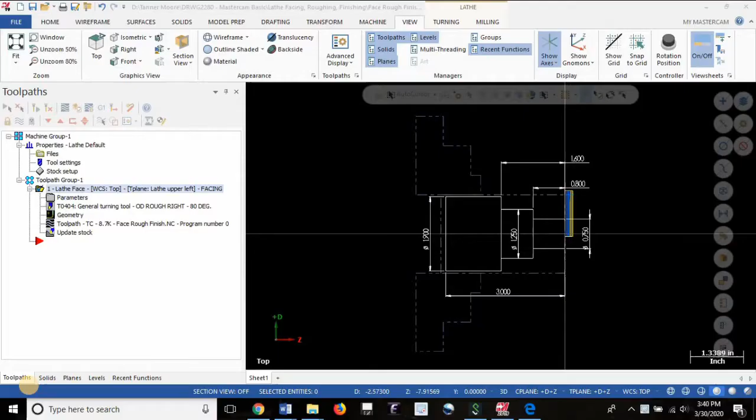Alright, in the last video we completed the facing operation on this workpiece. The next step is to do the roughing operation, and I want to clear out this chunk of material right here. We're not doing any turning on this 1.9 inch diameter, but we'll rough the 0.75 inch diameter and the 1.250 inch diameter back 800 thousandths out to the first shoulder, and 1.6 to the second shoulder.

Before we begin selecting any geometry or applying any toolpaths, one thing I want to do is get rid of this line segment between the diameters, because when the geometry is selected, it will get to this point and won't know whether to go up or down. So if we clear out this section here and this section here, we won't have any issue with geometry selection.

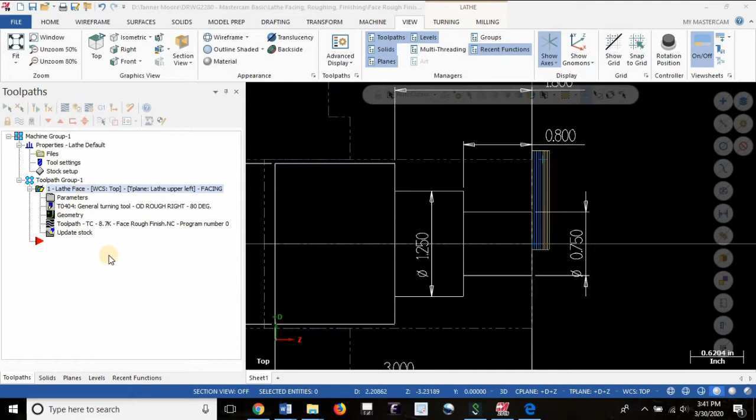It's always good to tidy up your drawing first before doing any toolpath application. I'm going to tidy up this window by hiding the toolpath for the face operation. Let's go into wireframe. I'm going to use the divide function to get rid of that line. You can see we still have a complete profile, it just tidies up the whole thing a little bit.

So if we go to the turning operation, remember in the previous video we faced right up to Z0, so we're not doing any finish facing in this particular toolpath. We faced right up to Z0, and now we'll just rough and finish these lines right here.

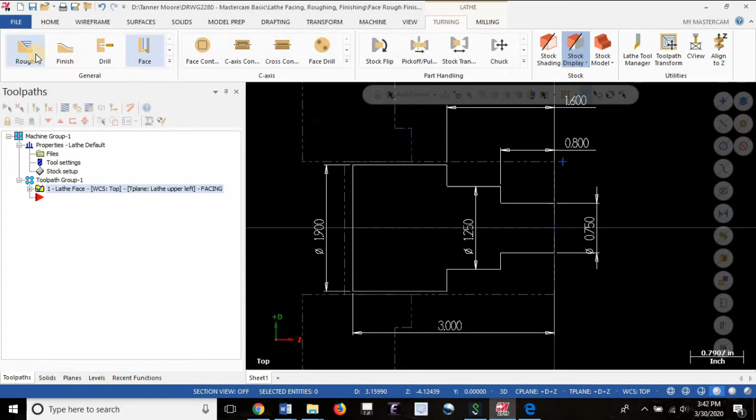Okay, let's pick the roughing operation. It says right here within this chaining window, select the entry point or chain the inner boundary. I'm not going to change any of the options here. It's a pretty powerful menu, there's a lot of tools here, but for what we're doing, and for the vast majority of work in Mastercam, you can take care of things with the default options presented to you.

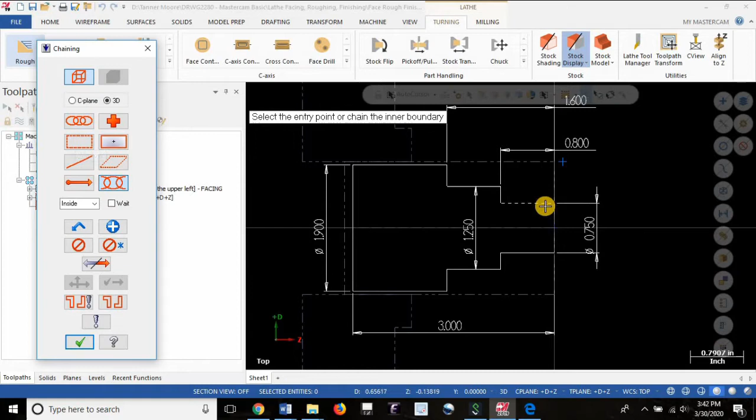Be careful again with your geometry selection. We want to start at this line moving in this direction. Just like when you're on the mill, you want to be careful about where along the line you select, because if we pick over here, it's always trying to force us to feed in a particular direction. It assumes if we pick on this half of the line, that's the starting half or first half of the line, and we don't want that. We want to go the opposite direction.

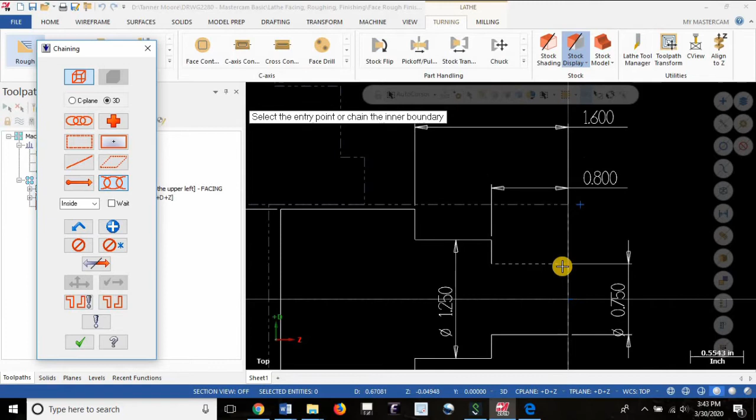So I'm going to hit the no smoking sign and then select the right half of this line, or the first half if you consider the direction to feed. We're going to go right there, and you'll notice the dialog box has changed to say select the last entity, the final line you want to be machining in this operation. It's a fairly visual representation of what you're doing, and we want to pick right here.

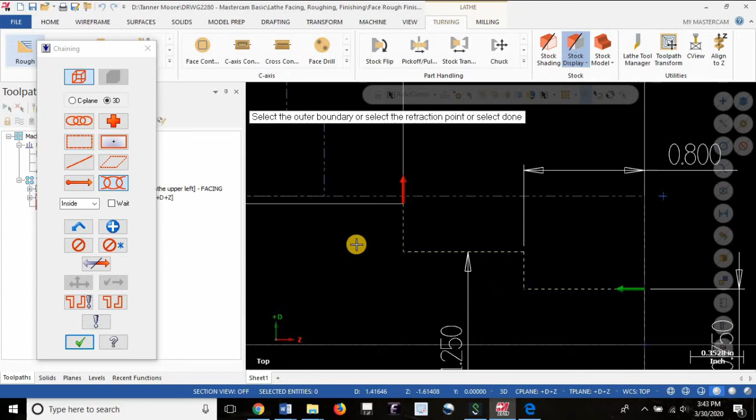You can be a little less careful about how you pick this line. If you want to maintain best practice, pick the bottom half here. Notice the dialog box has changed back to the original setting. I'm just going to hit check, there's no additional geometry to select.

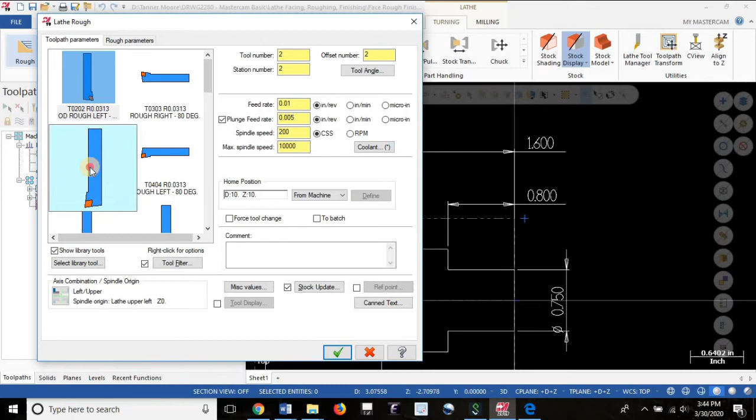We have to go back through the same process we did to select the facing operation. We're going to use a roughing tool just like we have in the shop available to us. The good news is we're going to use the same roughing tool we used for our roughing and finish facing, and I'll explain the force tool change button in this operation. We'll pick tool 4 as established in the previous video. You'll notice tool 4, offset 4, station 4 are all switched over now. It's the same tool nose radius, OD rough turning tool, right hand orientation, 80-degree insert.

For the feed in this roughing operation, we can go anywhere from 0.01 to 0.015. I'll stick with maybe 0.012. Plunge feed rate we can leave as is, that's your non-cutting but also non-rapid feed rate, you're in a G01 with an F program. If your tool rapids to this position and then feeds in before cutting, that's the slow feed rate. We can leave that alone, it's kind of nice to have a slow movement into the workpiece, a little less scary when running the machine.

Now with our spindle speed, we can get a little more use out of this tool because we'll be feeding toward the chuck, it's a more robust operation. So we go with 400 cutting speed, and again set the max spindle speed for safety because centrifugal force can cause the chuck jaws to separate and release the workpiece. We'll go with 2000 RPM, coolant turned on, and we'll turn this force tool change on.

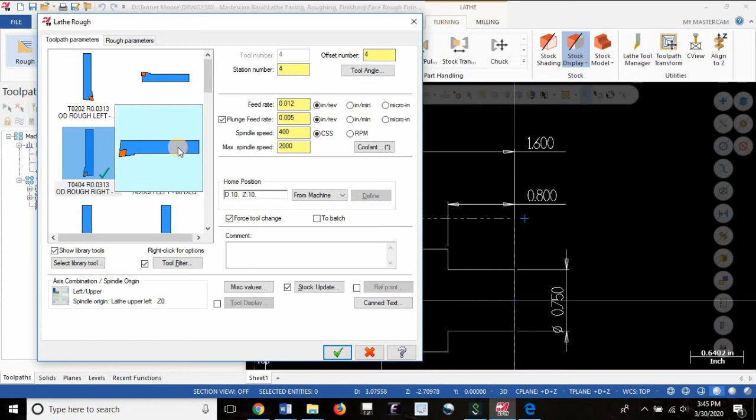I'll explain what this does right now. Because we did our facing operation with tool number 4, if we hadn't turned that on, when Mastercam produces the G code to send to the machine, the facing operation would happen and then immediately the roughing operation would begin with no pause or interruption in between. By having force tool change come on, it inserts an M01 and a tool change code, allowing us to stop the machine between operations to check the condition of the tool, take a measurement, check surface finish, or just be able to restart the program after, say, a lengthy facing operation.

You want to be able to restart quickly at roughing because you've maybe hit emergency stop or a feed hold and a reset in between. It just allows you a lot more flexibility and versatility. So you're better off to always use it and turn it on because it will save you more time in the long run. It very rarely costs you any time, but it often saves you a lot of trouble. I highly recommend always turn on force tool change, even if it doesn't make a difference.

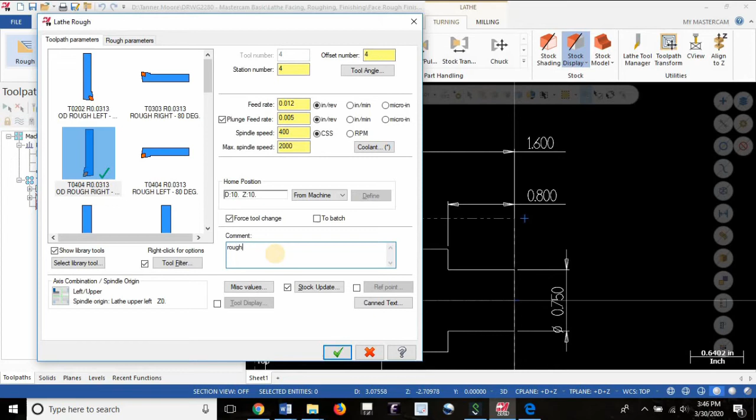So as usual, we'll give this a comment, and let's call this rough profile. Nice caps lock so everybody can see. And within this window, you can see it's a little more detailed than what we had in the facing operation, but we still only have to concern ourselves with a few certain fields.

First of all would be the depth of cut, and depending on what kind of machine you have, maybe you're only capable of a light cut of about 30 thou, or maybe you're on a more robust machine where you can go 150 thou radial depth of cut. I'm going to go with something a little more modest for a common application of about 60 thou. It's aggressive but not overly aggressive.

And then we want to focus on the stock to leave in X. This is your rough surface right here, and this is your finished surface. How much are we leaving on for finishing? The advice I typically give is to slightly exceed the tool nose radius of your finishing tool. So if you have a 15 thou tool nose radius, 0.015, maybe you can input 0.02 to get good cutter engagement, good tool life, and a great surface finish on your workpiece when you go to finishing.

Now in Z, you have to be careful because this is the shape of your insert right here. And when you bring your finishing tool in to finish this surface after roughing, if you've left a lot of material on Z, you get a lot of engagement between this face of the workpiece and this face of the tool. In order to avoid that, we go with a lot less material left in Z to reduce stress on the machine. You can go pretty low with this number, about 0.003. You'll still get good results, but you do have to be careful about leaving too much material in this category.

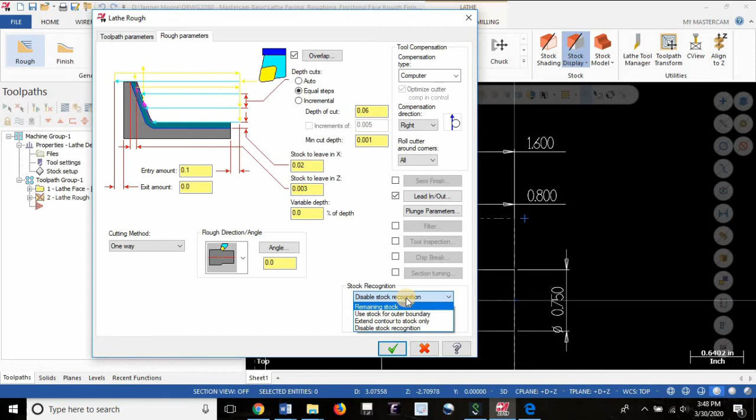One more thing I want to change here, because most stock settings work just fine as a default condition, is changing the stock recognition to remaining stock. So I'm going to go from disable stock recognition to remaining stock. This will make the computer consider, look at that, after hitting the green check mark, how quickly that generated. Anyways, it causes the computer to consider where the rough material, or how much material has been removed already with facing, but how much remains before doing your roughing, to decide where the tool path is generated. That's a really important one that can help avoid some crashes on the machine.

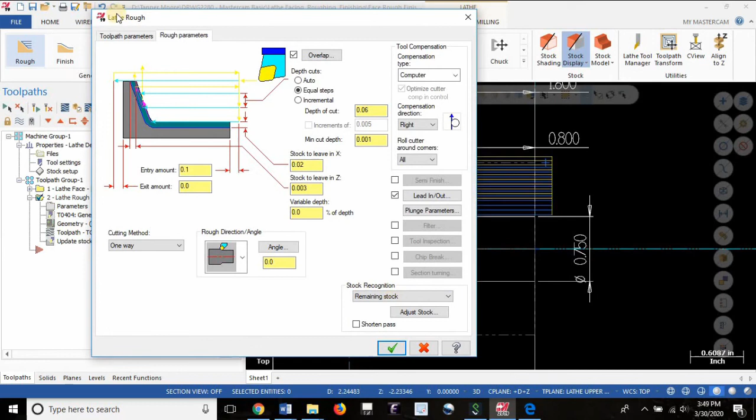I would encourage you to turn that one on as often as you have a choice to, just like force tool change. But let's take a look at that operation. Everything looks pretty tidy. You can see here on the negative side of the workpiece, or what is below X0, that's the pattern you would get out of your workpiece. Let's take a look at the back plot, and then we can do a quick simulation coupled with the facing operation.

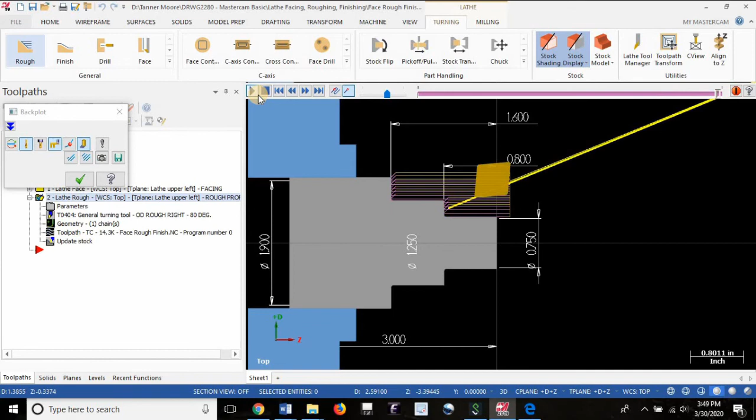You get a really effective tool path. It sure beats writing the G code to perform the same operation, especially this feed path right here, where you see it goes up and over 2 different diameters. It would take you a little while to write that code, but it's pretty easy to generate in a few steps. And if you want to do something like increase your depth of cut, it's pretty simple. Go right here, go to 100 thou depth of cut, regenerate, and you can see here, there's your heavier cut. The blue lines being your feed lines, or G01s. Your yellow lines being your rapid movements back out.

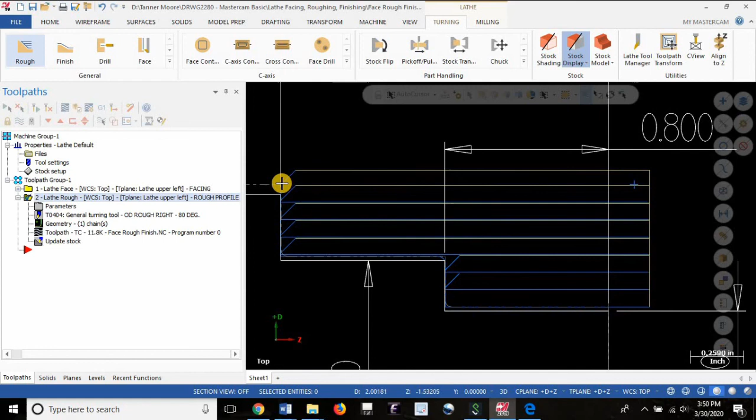So what happens is the tool rapids in to here, feeds in blue, and this is your lead out right here. It leads back out by 45 degrees, probably by a length of about 0.1, and then rapids back out, rapids down to the next position, feeds in blue line out for G01, and then G0 again back for the clearance. So there you go, there's your roughing, and let's take a look at that with your facing operation in the 3D simulation.

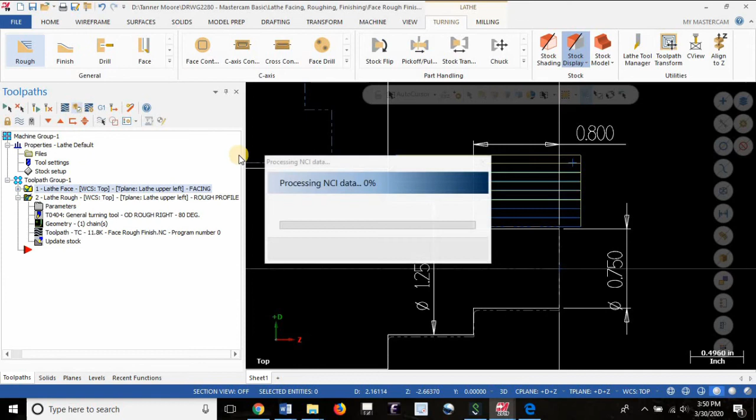A quick overview of this window right here. I like to turn on stop conditions operation change, so there's a pause in between facing and roughing, just like having your optional stop turned on the machine.

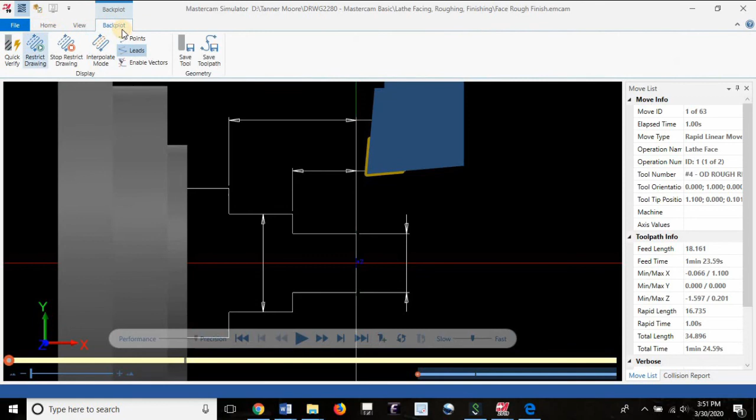And then I'm going to turn backplot back on. Sorry, verify, there we go. Color loop turned on to see the difference between operations. There's your facing operation. And there's your rough turning operation. No collision with the chuck jaws.

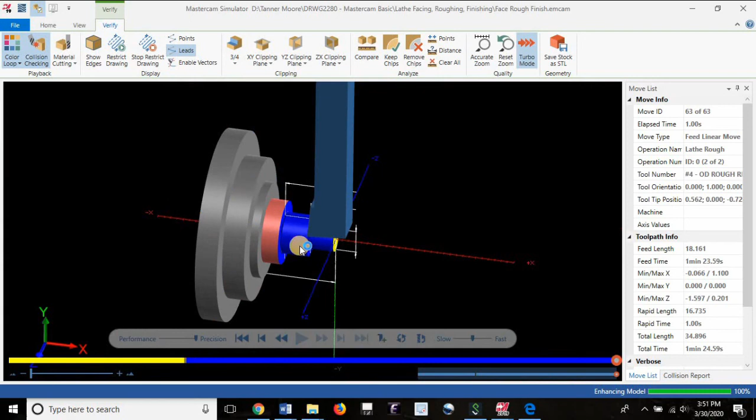And then all that's left is a finishing operation for another video. Save your work.